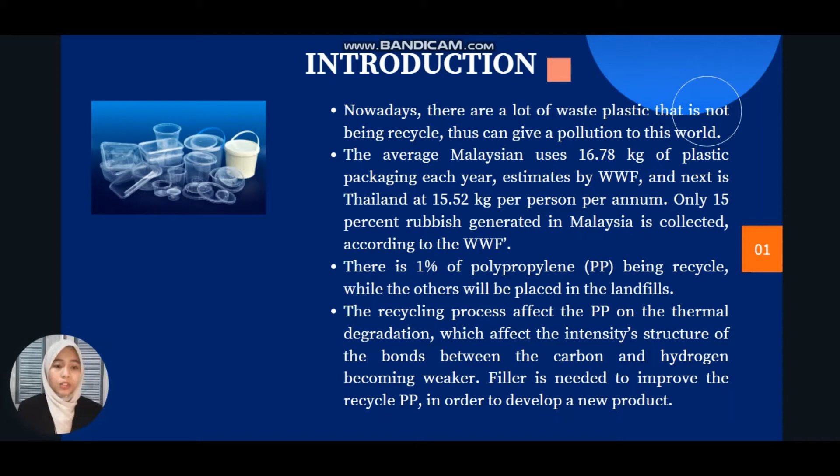So, actually, in polypropylene, there are toxic additives, which are known as cadmium and lead. So, this will cause harm to the environment, and if the soil absorbs the toxins included in the polypropylene, it will harm aquatic creatures. This is because the water from the soil will flow into the river and the ocean.

So next, in this study, fly ash had been chosen to act as the filler in the PP bond to reduce the limitation of the recycled PP in the thermal degradation factor. So before, coal-based power stations cast away all the fly ash in returning strip mines or buried it in the landfill. So this can contribute to health hazards because of the presence of toxic metals in the fly ash.

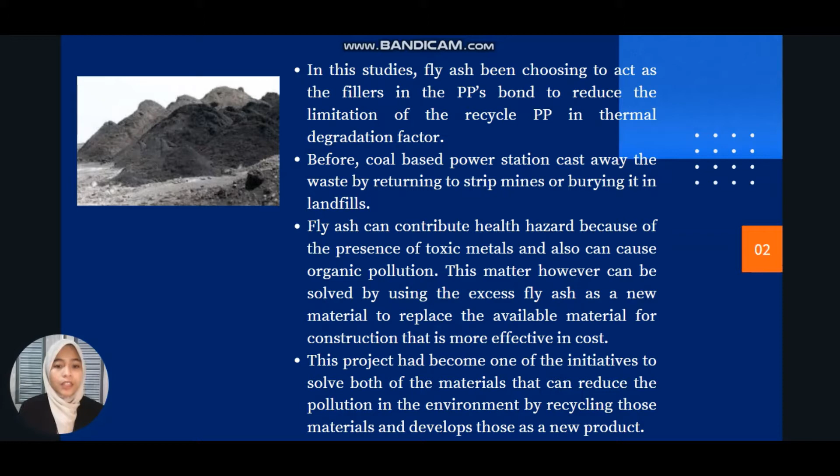However, this can be solved if we use the excess fly ash to produce a new material that can replace the available material for construction and is more cost efficient. So this project has become one of the initiatives to address both materials, reducing pollution in the environment by recycling those materials and developing them into a new product, which is pavement.

So next is the problem statement for this project. So the polypropylene will undergo thermal degradation when the recycling process occurs. The molecular weight and the chain length of the polypropylene will be decreased as the thermal degradation causes chain scission in the polymer. So this will affect the mechanical properties of the polymer, such as the stiffness, the ductility, and the brittleness of the polypropylene.

So this polymer can be preserved from thermal degradation by synthesizing it with a filler, which in this project is fly ash. So the filler will fill in the polypropylene matrix and retain the polymer chain and molecular structure of the polymer.

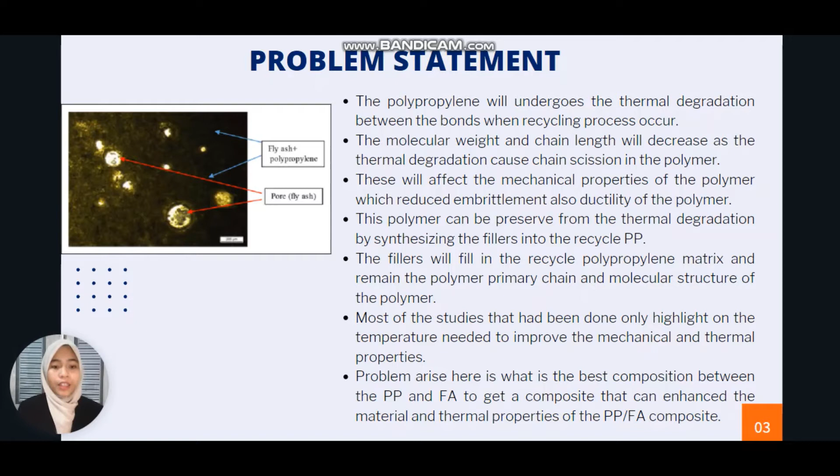So most of the studies that had been researched before only highlight the temperature that is needed to improve the mechanical and thermal properties of the composite. But there are no studies that highlight what is the best ratio to produce a composite with good mechanical and thermal properties.

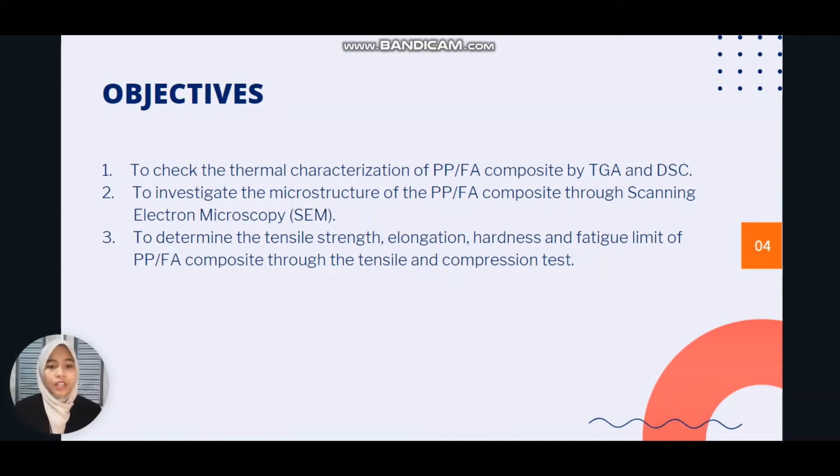So the objective of this study is first to check the thermal characterization of PPFA composite by TGA and DSC, then to investigate the microstructure of the PPFA composite through scanning electron microscopy (SEM), and to determine the tensile strength, elongation, hardness, and fatigue limit of the PPFA composite through the tensile and compression test.

And then the recycling polypropylene techniques. So most of the techniques that we use to recycle polypropylene are the mechanical recycling process, chemical recycling process, and thermochemical recycling process. But in this case, PP had been recycled through mechanical and chemical processes due to its ability to be melted and molded.

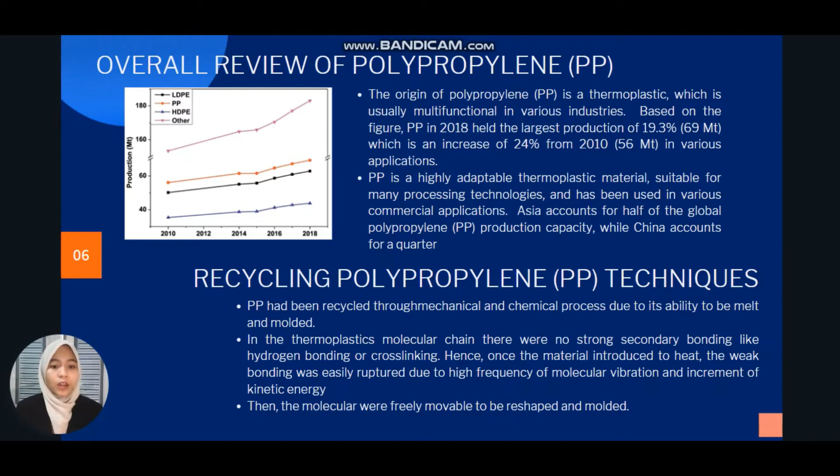So in the thermoplastic molecular chain, there is no strong secondary bonding like hydrogen bonding or cross-linking because polypropylene is a linear structure where the molecules are held together via van der Waals bonding. So when this material is introduced to heat, the weak bonding is easily ruptured due to high frequency of molecular vibration and increment of kinetic energy. So this will make the molecules freely movable and easy to be reshaped and molded.

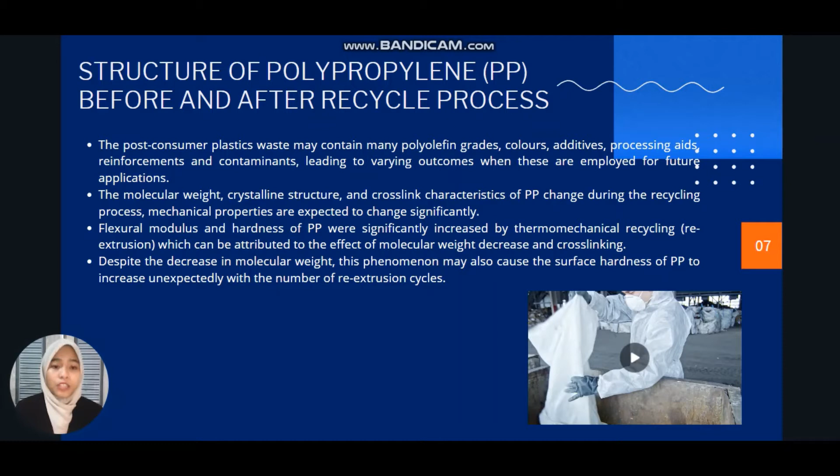So next is the structure of PP before and after the recycle process. So the post-consumer plastic waste may contain many polyolefin grades, colors, additives, processing aids, reinforcement, and contaminants, leading to varying outcomes when these are employed for future application. So the molecular weight, crystalline structure, and cross-link characteristics of PP change during the recycle process, which can also give a significant change in the mechanical properties.

So the modulus and hardness of PP will significantly increase by thermomechanical recycling, but the tensile strength will be decreased. Then with the decrease in molecular weight, this phenomenon may also cause the surface hardness of PP to increase unexpectedly with the number of re-extrusion cycles.

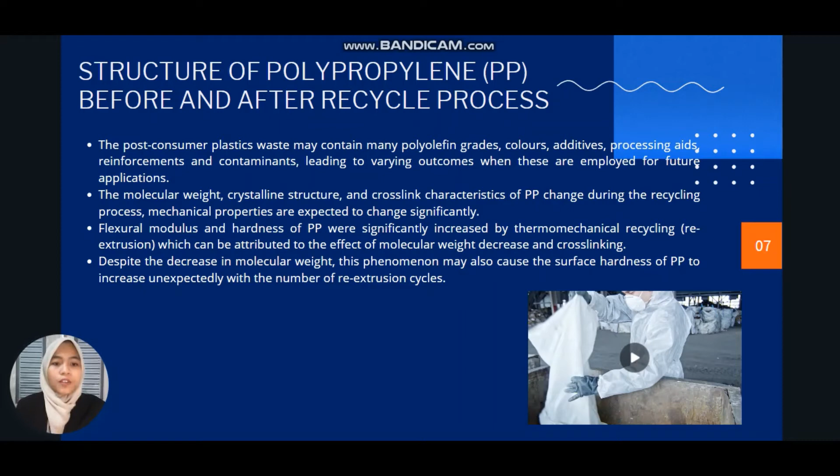So next is polypropylene composite. So in this study, we studied 3 types of composite, which are PP natural fiber composite, PP mineral composite, and PP fly ash composite.

So for the PP natural fiber composite, the natural fiber is often being used as the filler in the polymer matrix in order to produce the biodegradable polymer composite. So in this case, we use kenaf, bamboo, hay, sisal, hemp, and rice.

And then lignocellulosic fiber that is found in the natural fiber has a great affinity for moisture absorption that may cause a bad impact on the dimensional stability of the polymer with natural fiber composite. So to solve this problem, modification of natural fiber is required. So based on the literature review that had been made, some of the research had used sodium hydroxide to make surface modification on the natural fiber.

So according to Rimdusit, he stated that the particle size of the wood flour that's suitable to improve the mechanical properties was between 200 to 300 micrometers. But if we use more than 300 micrometers, the flexural and the tensile modulus will be decreased due to the surface area for polymer wetting for the large size particle being less. As a result, the load transfer between the large size filler and the polymer matrix is reduced.

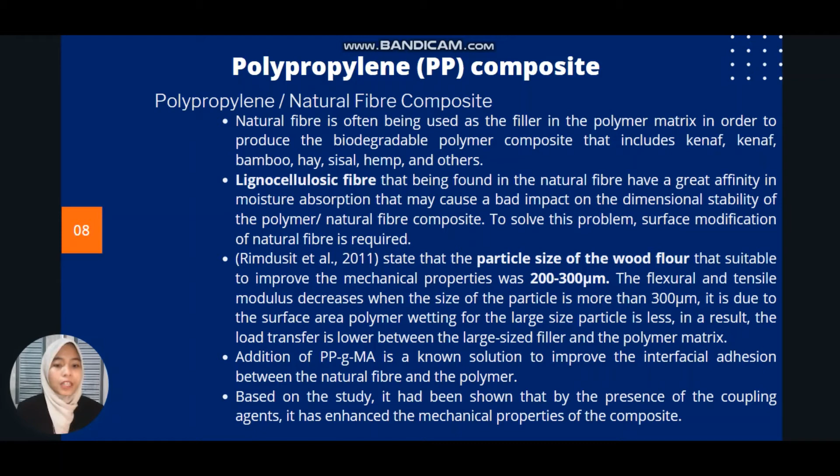And then addition of PP-g-MA is a known solution to improve the interfacial adhesion between the natural fiber and the polymer. So based on the study, it showed that the presence of the coupling agent can enhance the mechanical properties of the composite. So next is the polypropylene with mineral composite.

So Zhai et al. reported that by using mineral as the filler in the PP matrix, the hybridization of the AT in the composite enhances the mechanical properties of the neat PP. So the figure shows the difference of tensile fracture, where A and C show the tensile fracture for the untreated AT-PP composite, while figures B and D show the treated AT-PP composite.

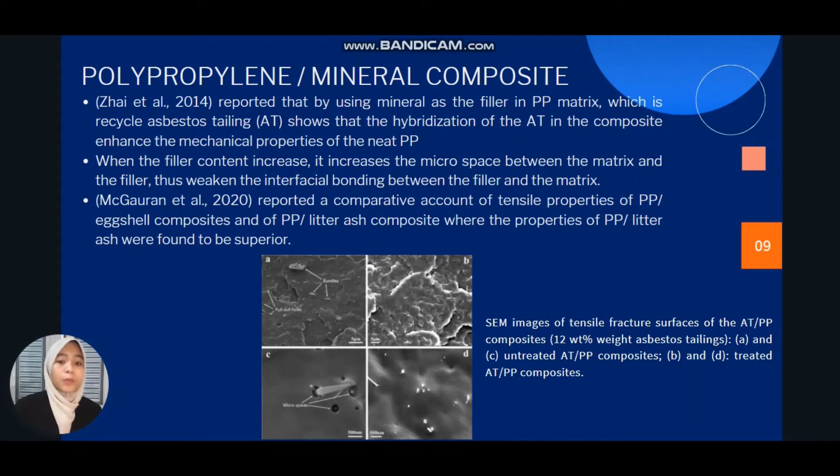So in this case, it is shown that by adding mineral into the polypropylene matrix, it can enhance the mechanical structure or the mechanical properties of the polymer. So next, polypropylene fly ash composite. So in Europe, fly ash recycling has been extended to road construction. However, the material used for road construction still includes aggregate and cement to enhance its strength.

But in this project, we try to find a solution in which we would not use aggregate or cement to enhance the strength of the composite. We just use polypropylene and fly ash. So due to the low surface friction of fly ash, the interface bond with untreated FA is weak. So the introduction of FA as a filler to improve the composite is problematic. So in this case, we need a coupling agent to help the dispersion of ash particles in the PP matrix.

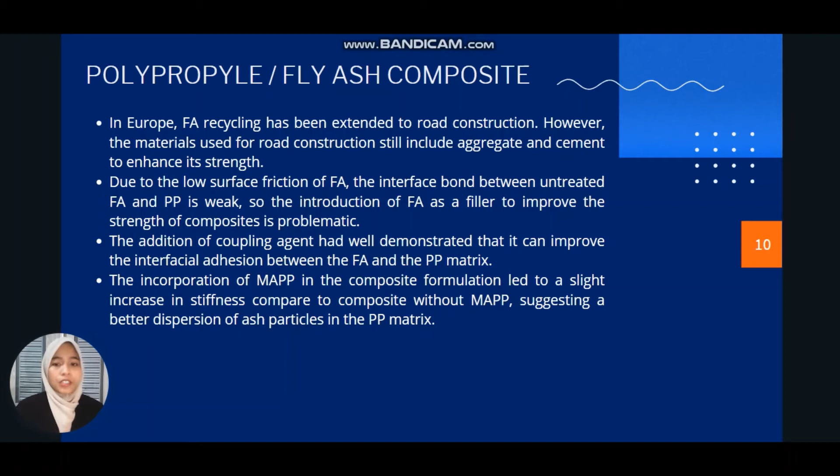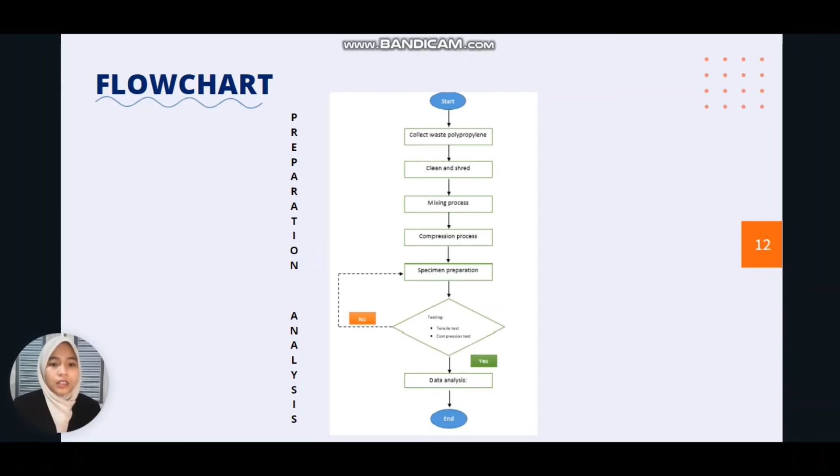And next, we will look at the methodology. So this is the flowchart of how we prepare the composite. So next is the composite preparation. So first, the mixing process. Polypropylene and fly ash will be mixed in the TSE machine at a ratio of 100 to 0 to 80 to 20. The machine runs at a speed of 60 RPM at 200 degrees C.

So for the first sample, we use 300 grams of the mixture. We put it into the hopper of the TSE machine, while for the second until the last sample, we only use 200 grams of mixture because we want to save the mixture that we have. And then when the product has been produced from the TSE machine, it will be cut into small pieces.

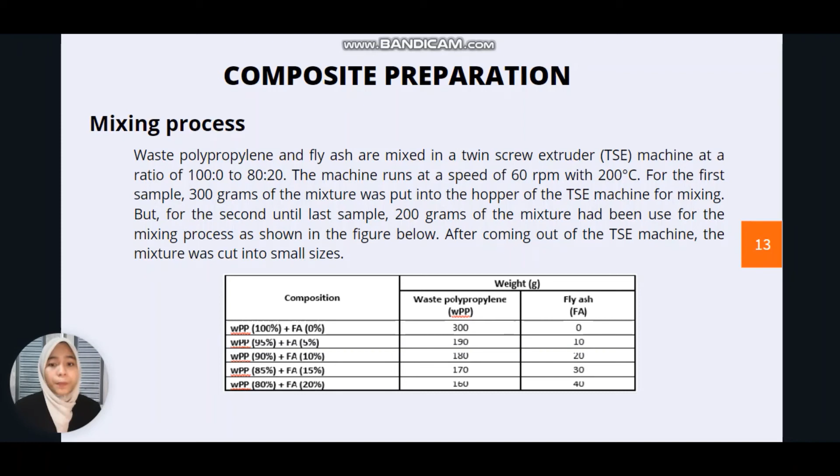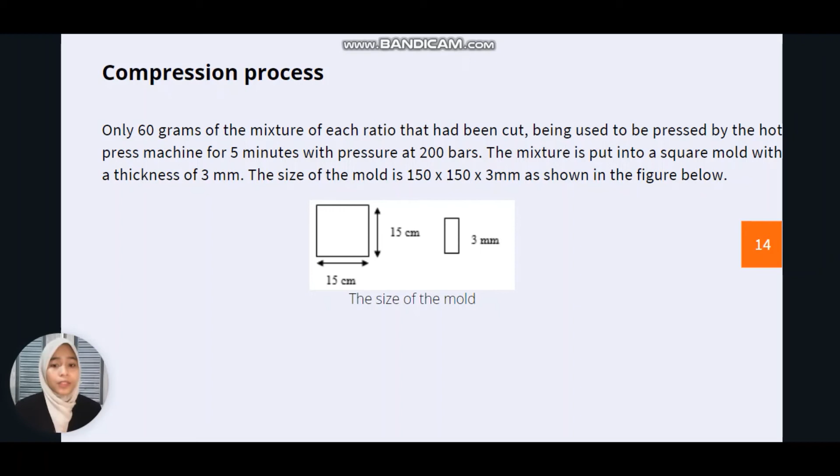And then for the compression process, only 60 grams of the mixture produced for each ratio will be compressed by the hot press machine for 5 minutes with a pressure of 200 bars at 200 degrees Celsius. The mixture will be put into the square mold. The figure shows the dimensions of the square mold, which is 15 centimeters in height and length with 3 millimeters of thickness. Next, testing.

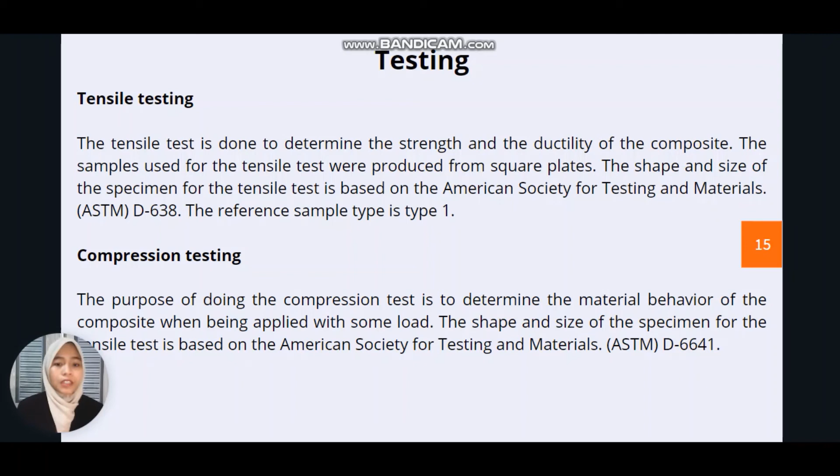So the testing that we made for this composite is tensile testing and compression testing. For the tensile testing, we use ASTM D638 as the reference for the shape and size of the specimen, while for the compression testing, we use ASTM D6641 for preparing the specimen shape and size. And then we also do thermogravimetric analysis, TGA and DSC, on this specimen. For the TGA and DSC, we will analyze the recycled polypropylene and also the pure resin.

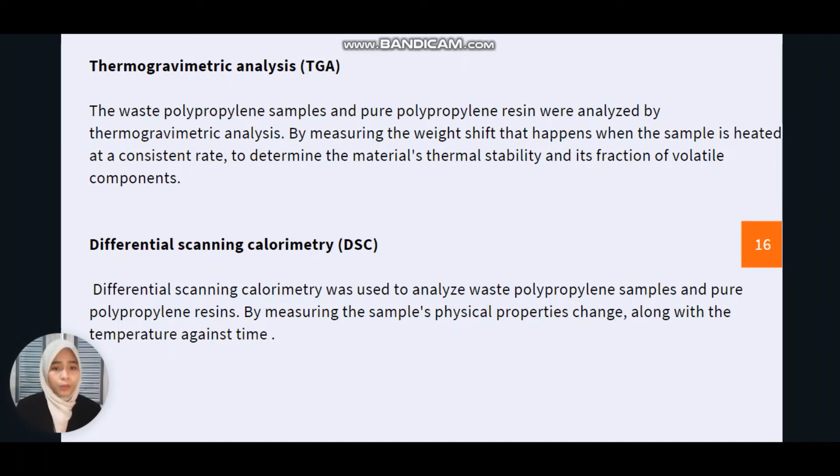So the second factor is the equipment used to prepare the sample is not proper, because while preparing the sample, we only used a handsaw to cut the composite into the dog bone shape. So it is not accurate. Actually, we need to use the cutting machine provided in the lab, in the workshop, to get an accurate dog bone shape, so it will not cause any defect or inaccurate result for the testing.